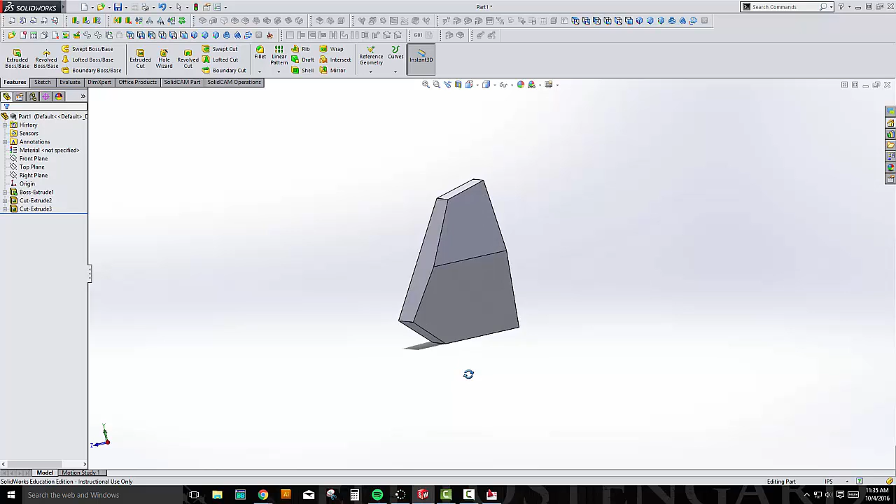Alright guys, today I'm going to give you a quick demonstration on the folding line technique. If you remember back to when we were doing orthos 1 through 4, you've got this odd shaped drawing here. That was a little bit difficult to get the top view on unless you utilize this technique. So we're going to take a look at how to use the technique, and I'm going to demonstrate how to get the top view for this particular drawing.

As you notice, I've got both the front view and the side view already created, as well as my layers created. Okay. So when we get to this point, this is going to be very similar to what you would have for your missing view assignments, where you have got two views and you need to get the third one. So to start off, we're going to create our folding line.

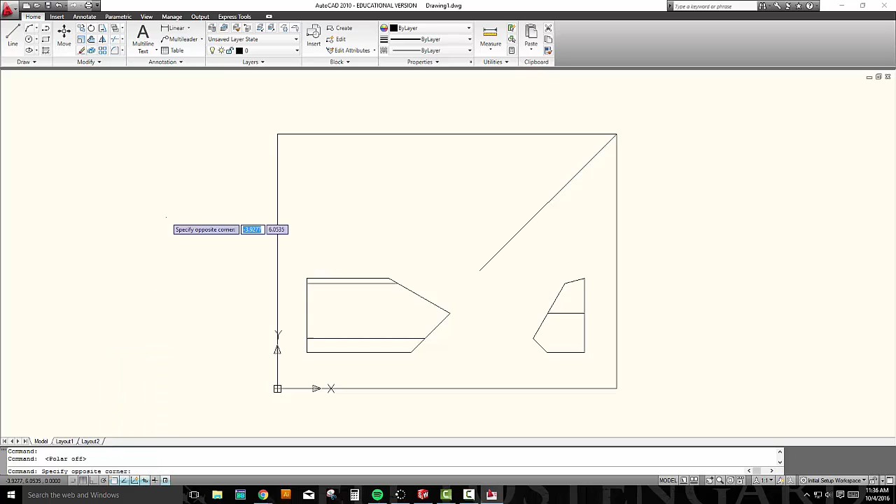Now the folding line is a 45-degree line that allows us to transfer all of our vertical distances or horizontal distances into the other distance, whether that's vertical or horizontal. You need to make sure that this is exactly a 45-degree line. So you need to come over to your polar tracking before you do this, and set it up to have a measurement of either 15 or 45 to enable you to get a perfect 45-degree line.

Once I have that perfect 45-degree line, I can then bring lines up beyond the 45-degree line here. And then anytime that they hit this folding line, I'm going to fold them over into the horizontal. Now using these lines right here in conjunction with my front view, I can very easily create my top view.

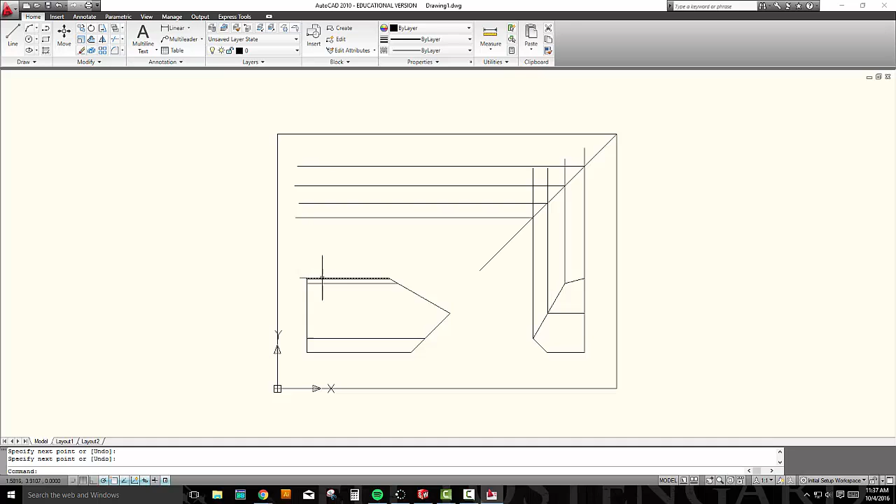For instance, if I'm looking for this particular point, I know that that happens to be this point over here. So that point is going to be found by bringing this one up and then following where the line comes up and over from my side view into my top view.

So using the folding line here, this particular point comes over to here, bring this line up, okay, and it's going to intersect from right here to there, which tells me that since this line comes across all the way to the top here, the line that I'm looking for is going to be from there to there. After I've got that point, I can delete this one here.

Now this line comes down at an angle, as we can see. Looking right here, this has got a bit of an angle. To find that angle, I would look at this point here, which matches up with our widest point. Bring that one up to my top. It comes from there to there, so this point right here connects to this point, which allows me to very quickly get that line.

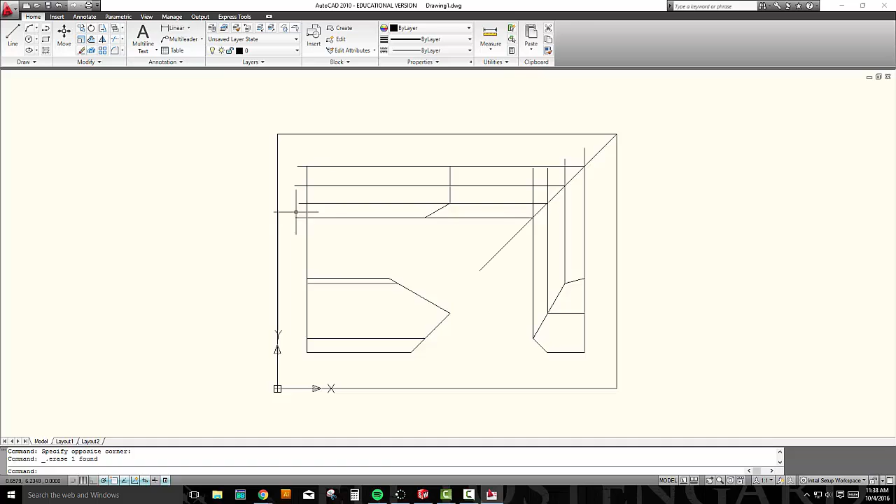Doing the same thing, I know that these lines end up coming through and touching here, so I can go from here to there, back over there. I can get rid of these lines. Now that I'm done with this side here, I can get rid of these lines in order to clean up my drawing a little bit, and I can continue focusing on some of my other parts. I don't have any need for this one anymore, so let's get rid of that one.

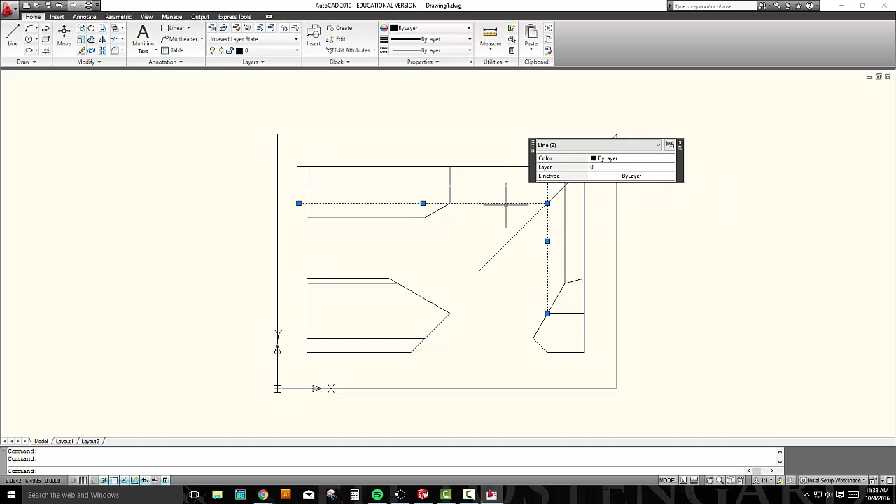And then let's start working on how to get this section along the top right in here. If we're looking at this in our front view, it's going to be represented by these areas here. So we've got this part already done. Now I need to get these two parts. This point right here is going to match up with the very top, so that would be this line coming up and over. This one here is going to match up with this lower point, which comes up and over.

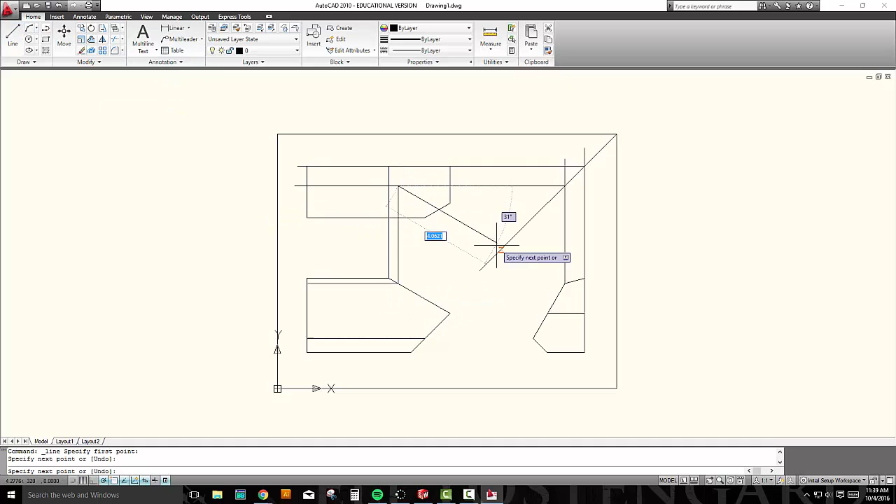So connecting those two gives me my 2 points. That's going to create my line. Then all I need to do is connect the 2 dots and connect it to another known point. I've got those taken care of. Now all I need to do is create the hidden lines for the lower portion of this.

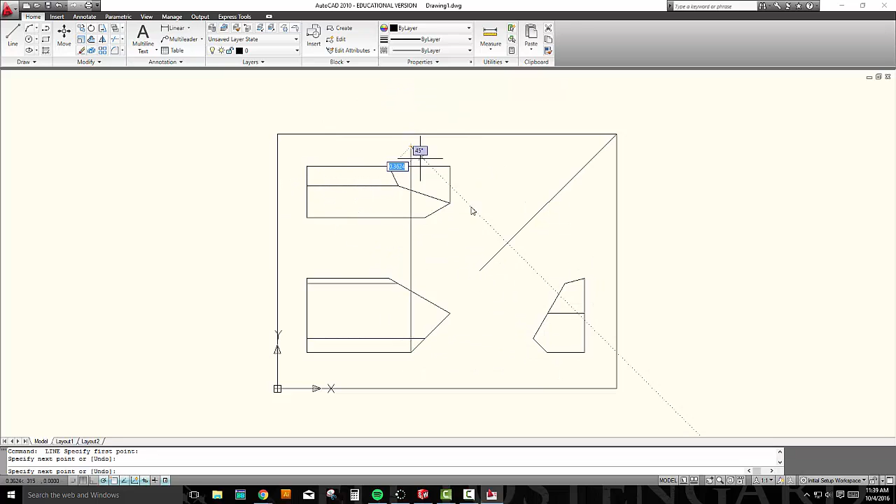In order to create the hidden lines for the lower portion, I'm going to bring these lines up. When this line in the side view crosses my folding line, I'm going to bring that line back over, which tells me that the bottom half of this drawing is going to be right in here.

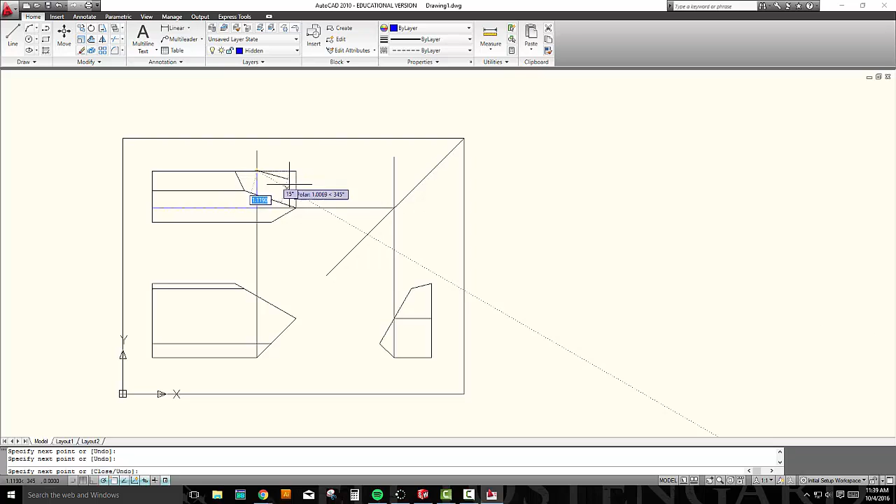I simply come over here, grab my hidden line layer, draw my lines across and up, and then I know that from those points they happen to come up here and touch right here as well. So I need to draw one last hidden line from there to there. After I'm done, I delete all of my lines, and now I have created my top view very easily using the folding line technique.